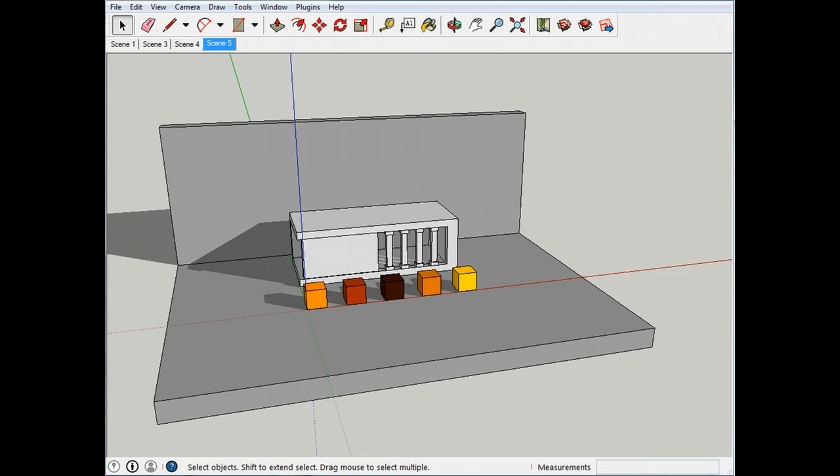First things that we need to do are: number one, set up some scenes; number two, check our geometry; and then number three, check our faces.

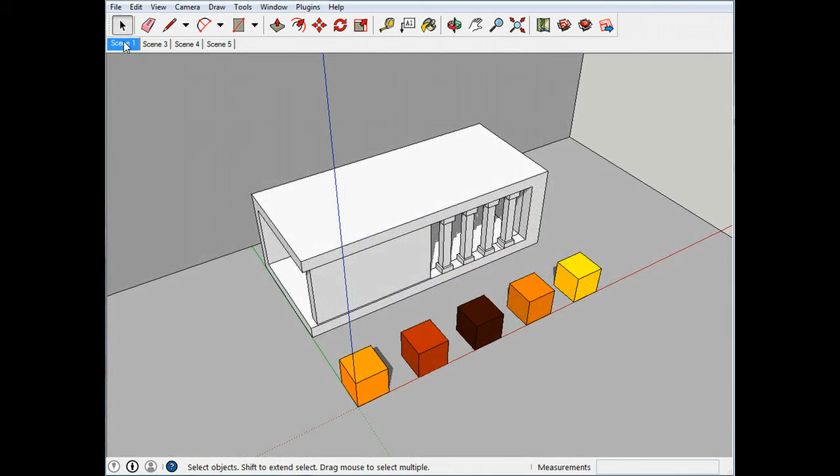So number one, our scenes. I've got some scenes already here. To get your scenes up, we go to View, Animation, Add Scene. That will place a scene in. Create a scene.

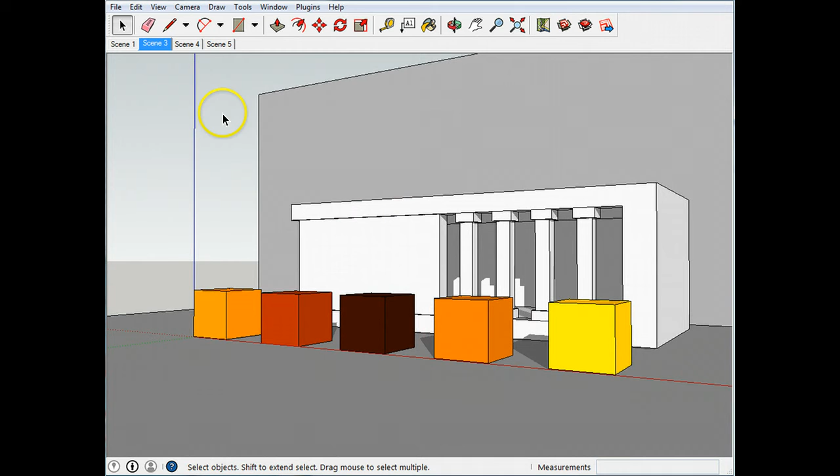That's created the scene. I don't need it, delete it. So scene 2, you can find a nice angle. Right click, update. There we go. Update.

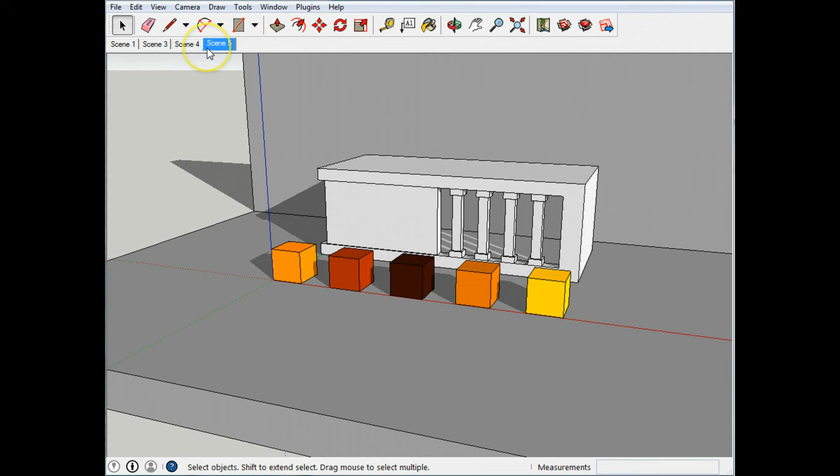So I've updated my scenes. It's good as a rough start, so you've got an idea of where the camera angle is going to be, what shots you're going to want, how you're viewing your objects. They'll all need tweaking in Artlantis, but that's kind of by the by.

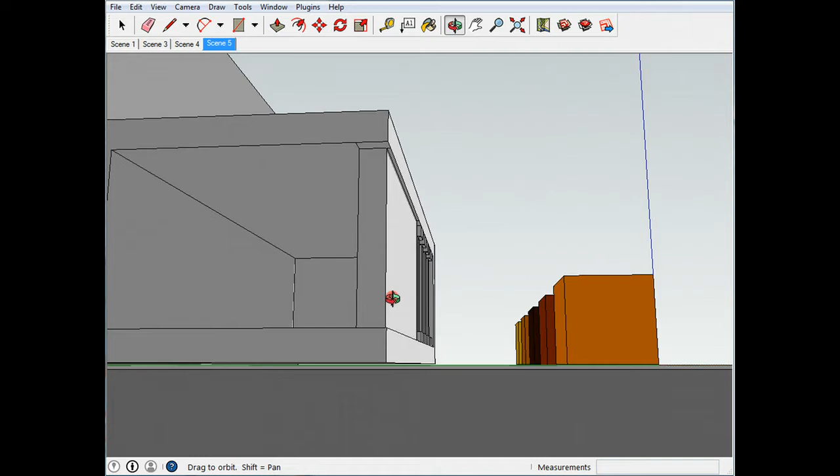Okay, so next thing, let's have a look at geometry. What I like to do is make sure that I include a shadow gap. When an object meets another object, especially if they're not perfect, you'll get a slight shadow gap at the bottom here, and that's where light is hitting it, but it's not quite getting into the corner, and it's not bouncing back at the camera.

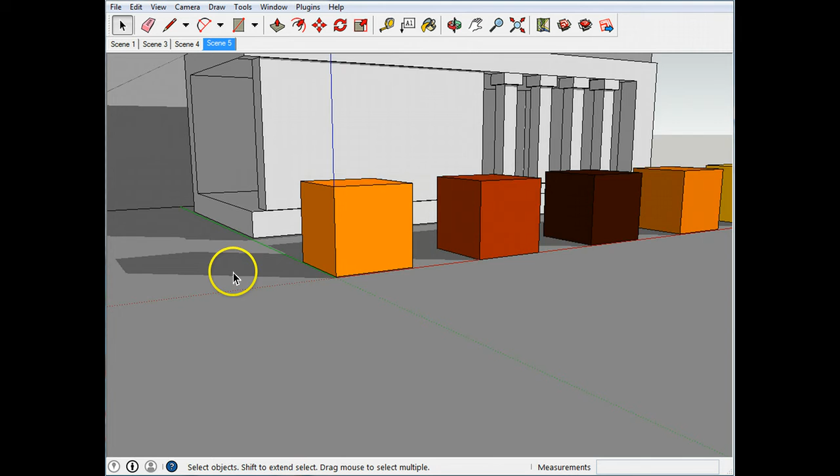So what we can do is encourage that by taking our floor here and just dropping it down by 3mm. That's going to give us a lovely minuscule gap. There it is, you can just about see it. That's all we need, just a couple of mil.

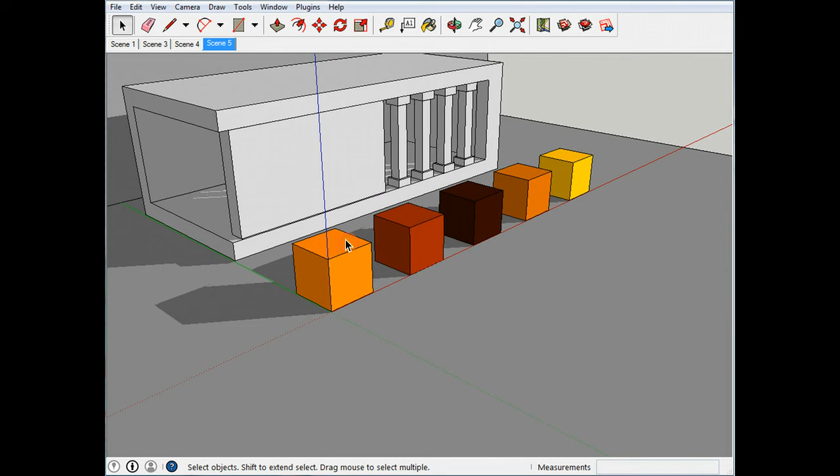And we'll see that in Artlantis later. It's just a little thing, it kind of fakes reality a little bit.

So the last thing I mentioned was faces. We need to check our faces. So if we go to View, Face Style, and then Monochrome, we need to check our model for blue faces.

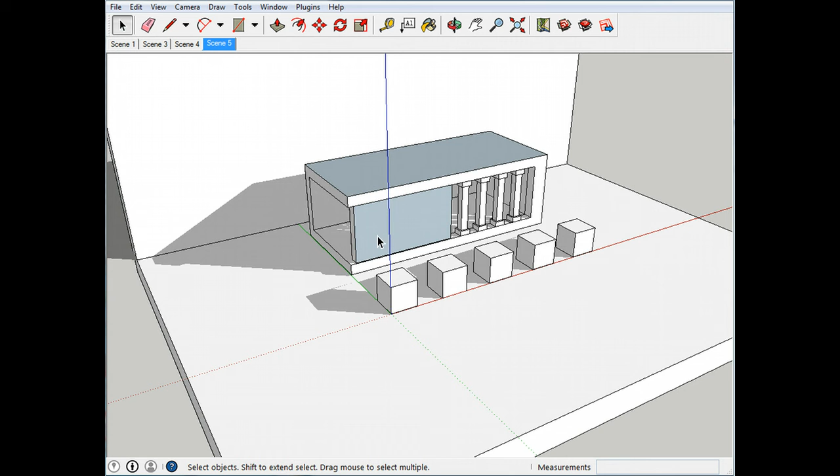Now, what we need to understand is that Artlantis likes white faces, and what we need to do is change all the blue ones to white. To do that, we can go into our group by double clicking our group, then selecting a face, right click and reverse faces.

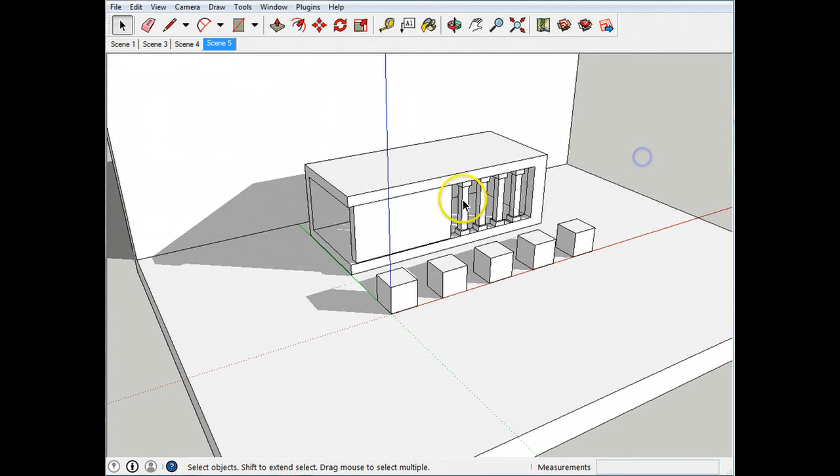That will reverse the face there, and again right click, reverse faces, click out of there. I can go to View, Face Style, and back to Shaded with Textures.

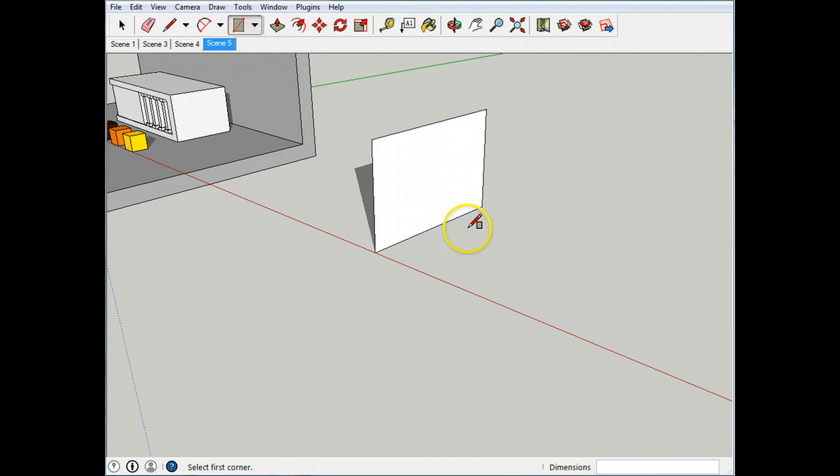Now that's because, let's just have a quick look. Okay, so I have a face. When we have a white face, light will hit that, it'll bounce into the camera, and we'll see the face.

When it's a blue face, sometimes light will hit it, and it just disappears, and it doesn't bounce into the camera. Now we can force two-sided sometimes - that's a way of getting around it - but sometimes it just doesn't work, and it needs to be the white face.

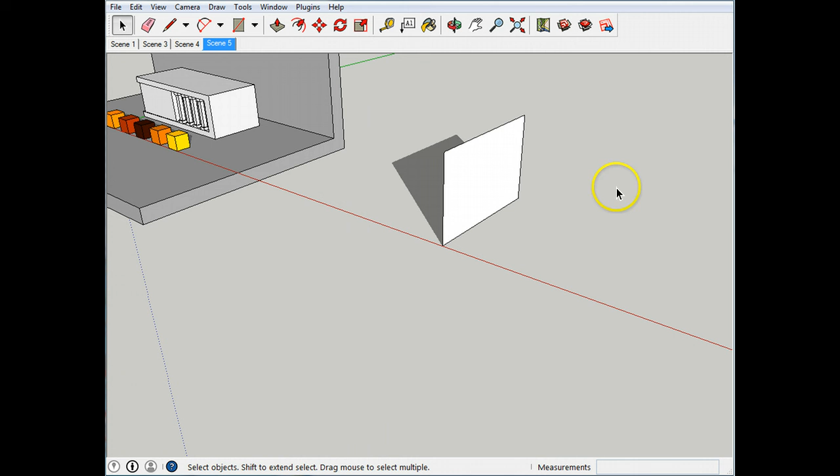It's to do with the kind of advanced terminology for it, called a normal. So the normal side is this white side. It's something to look into if you wanted to. So, look into normals. If not, don't worry about it - just make sure the white face is pointing outwards.

Okay, so I'm ready for this to go into Artlantis. What I can do now is go to File, Save As. We're going to save this as a version 8 file. Now Artlantis likes version 8.

So I know which file that is. Okay, so save it as a version 8. Artlantis likes that, and then we'll open up Artlantis.

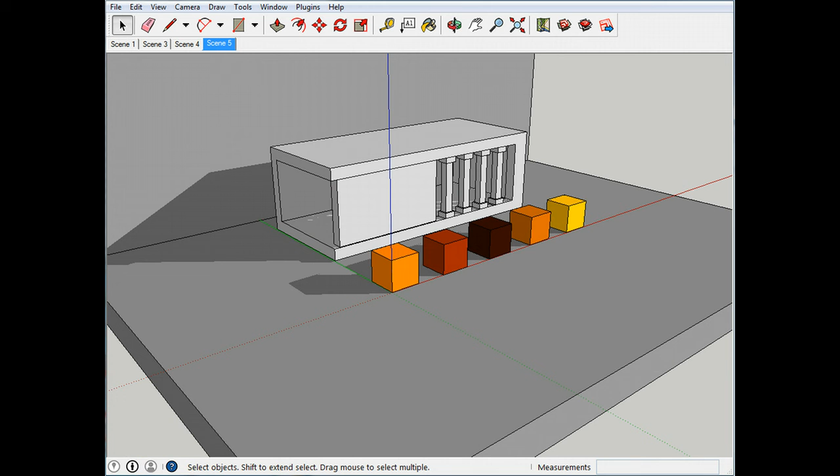Now, when Artlantis loads up, we need to hit key server, and that will connect to our server and tell us that this has a license. Let's have a look.